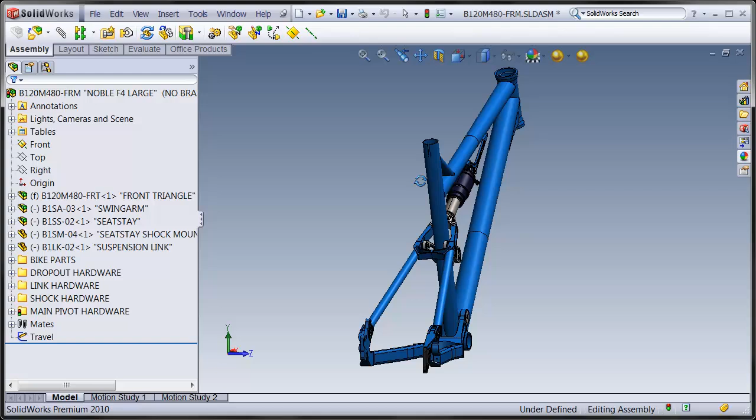And as you look at this, it may look like a fairly simple assembly with not too much going on. It actually gets out of control relatively quickly, and you've got to be aware of that. For example, if I bring up the Assembly Expert window, you'll see that the total number of components in this model is 92. That's a fair amount of components to keep track of, and you really want to make sure that you keep all this stuff organized, otherwise your model can be really cumbersome to work with.

And you organize it on the left side here in what's called the model tree. The way we organize it, we've got some top-level components that form the actual functioning frame. For example, we've got the front triangle highlighted in green, the swing arm, the seat stay, shock mount, and suspension link. These top-level components actually form the functioning suspension frame, and we can work with that and extrapolate data from that. It does not include any of the hardware.

The hardware is organized in its own little features. Like here we have these folders that have all the hardware in it, and we organize it in such a way that it points to a particular area of the frame. So for example, if I open up the link hardware folder, here you can see that we've got pivot axle screws, pivot spacers, and at the bottom here we've got some modified toolbox components. By organizing stuff like this in folders, it becomes very easy to locate parts as you work with your model, because like I showed earlier, we've got to keep track of 92 components, and that can get confusing very quickly.

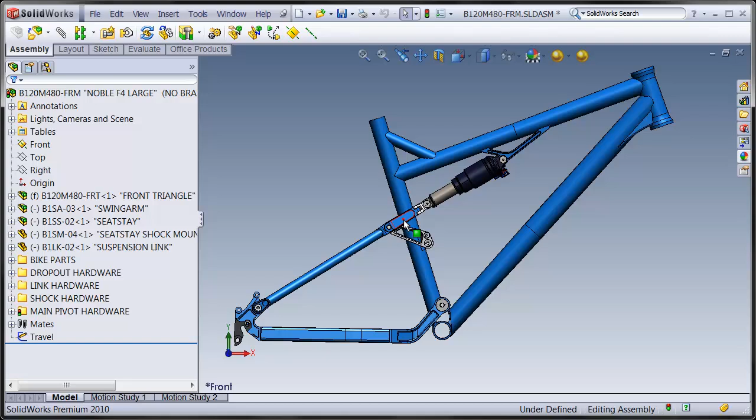Another thing to note is that this is a functioning 3D model. It actually works. But there's a little quirk here that maybe not everybody is familiar with. For example, if you look at the shock here, the shock is its own little assembly, and by default SolidWorks will want to bring that in as a rigid subassembly. The shock actually is compressible as its own little assembly, but if you bring it in rigid, the suspension won't move anymore.

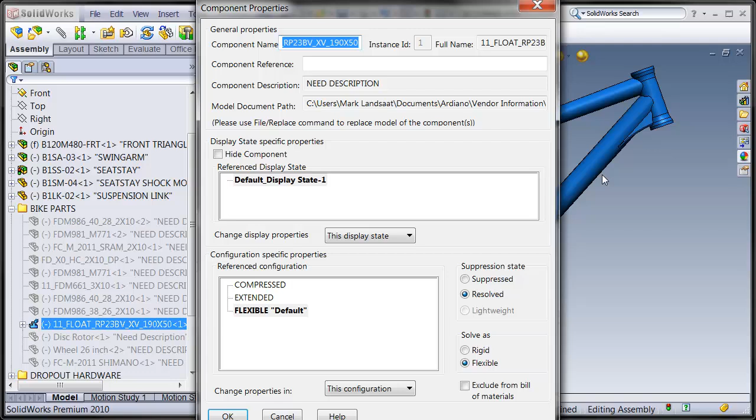So you actually have to come in the component properties window and change rigid to flexible to make sure that this thing will actually work as an assembly. Those are just some small things that are really important to know, because otherwise you end up with a model that is actually not functional.

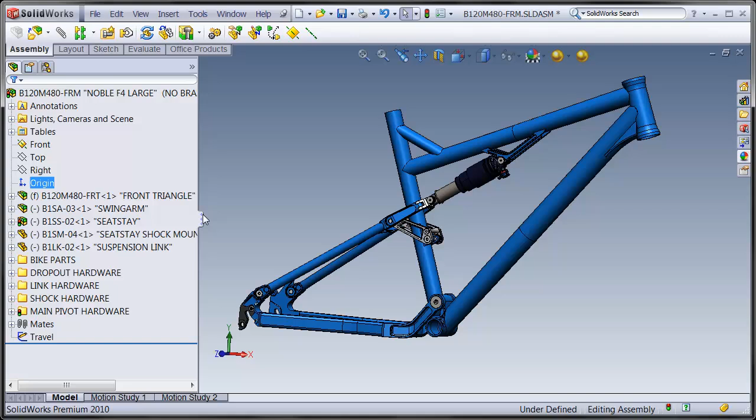So at the top level here we have a couple top-level components, and then all the hardware located in folders here. And then what we'll do in video number 2 is actually go into a little more detail on how we built some of these parts. For example, the next series will be the front triangle, and we'll show you how we set that up and how we actually built that model, and we'll go from there.